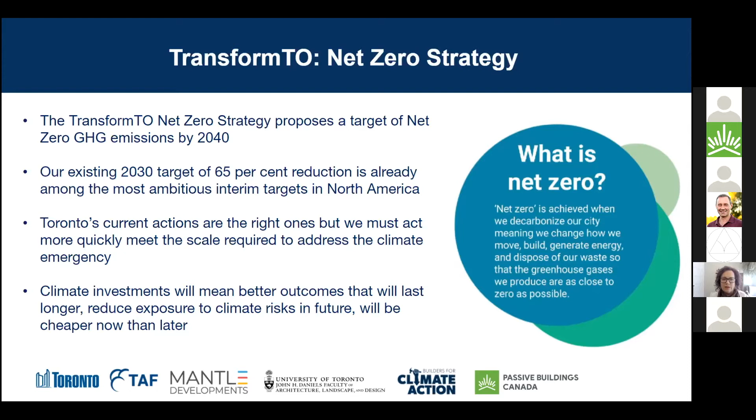And in December, our council adopted what's called the Net Zero 2040 strategy, meaning that our citywide target is to be net zero emissions by 2040 or before. And buildings in Toronto make up about 57% of our emissions out of that portfolio of different sectors. So it's a really important sector for us to really try to ratchet down our GHG emissions. And Ryan, you can go to next slide.

And one of the ways we do this, and the tool that I'm most involved with, is something we apply to new development, new construction. It's called the Toronto Green Standard, and it's been in effect since about 2010. It is a way that we take our official plan policies and our corporate objectives to improve the environment in new development and apply it as a set of performance measures and requirements in the planning application and approvals process. It's a tiered system. So tier 1 is mandatory for all new developments. We've had over 2,000 developments apply the TGS since 2010.

And the tier 2 or higher is a voluntary level, but it comes with a very good incentive called the development charge refund. And the benefit of that tiered system is it applies the 2-pronged approach, the carrot and the stick, so that we can introduce new important requirements, such as what we're going to be talking about today, to the development industry in a way that's voluntary, where they get used to doing something, it becomes more mainstreamed, and then bring it in as a mandatory requirement when possible.

And the TGS covers 5 categories of environmental performance. Right now it has about 36 performance measures in Toronto Green Standard version 4, and that comes into effect May 1st. So we're on our 4th version of the TGS, and we ratchet up the requirements each time. But it also includes something very important called the Zero Emissions Building Framework. And you can just go to the next slide, Ryan.

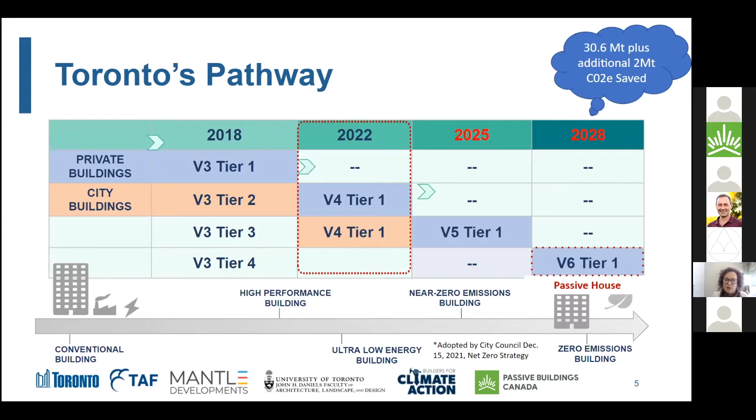Next slide, Ryan. So, about a year ago, there was a lot of activity and discussion really starting to emerge, I would say in the Toronto area anyway, and in Ontario about this important new emerging issue. And we've always been aware of it and wanted to introduce this into the next TGS, version 4. But the federal government, NRCan, was working on this. The Endeavour Centre, Chris Magwood, who you'll hear from, was doing quite a bit of work on this topic, and for the City of Toronto as well as part of our existing building strategy. And Kelly Doran was doing quite a bit of work with U of T. And Ryan, of course, who you're going to hear from, has been a leader along the way, working on policy initiatives across the country and elsewhere.

And so there was a lot of dialogue starting to happen, and this was being brought to us. And we really decided that based on the urgency of this issue, we needed to move these studies along faster. So we knew that we wanted to introduce requirements for embodied emissions reductions in the TGS, but we wanted to get these studies going sooner. So we're lucky to have the Atmospheric Fund as a local affiliate organization with the City of Toronto that offers grants across Ontario, who was able to support both of these great studies that you'll hear about today, so that we could move this analysis and understanding of the issue faster.

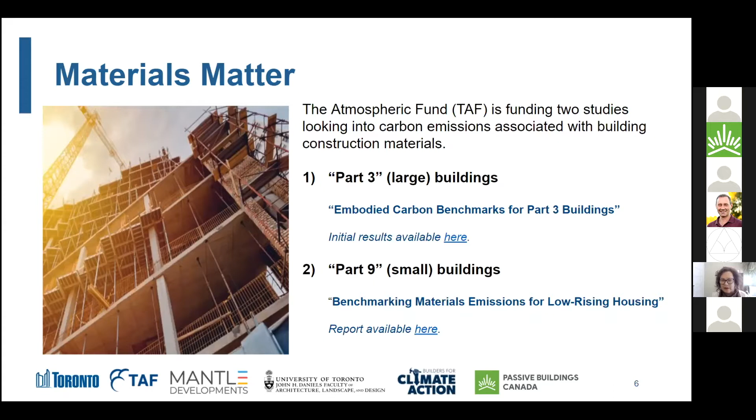Next slide, please. And so for now, in TGS 4 May 1st, 2022, what we do have is a voluntary level requirement to do the tracking of upfront emissions from structural and envelope materials, to require that in Tier 2 or a higher level in Tier 3. And for any city-owned buildings, they must do the tracking and reporting. But what we're looking at is whether we might be able to go further with that in 2023 and set out some targets. Now, we have set out some targets in the low-rise Part 9 buildings for now, under Tier 2, the voluntary level 2. Next slide, Ryan.

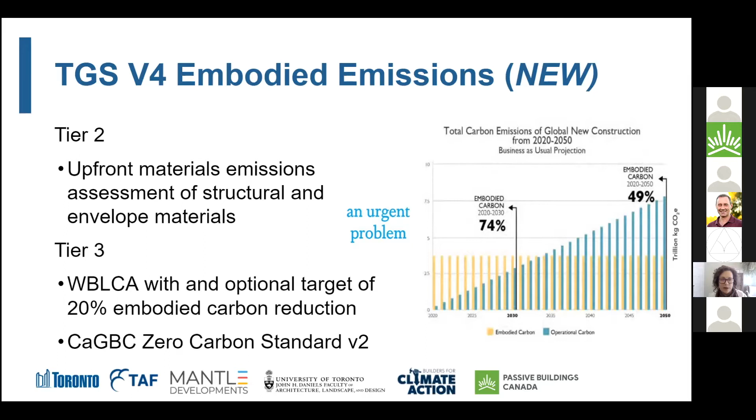So for today, we really want you to have a lot of time to hear from the leaders that we've got on the agenda today, and I'll introduce them in a second. But the idea is really to get your input, get your feedback on the studies and the potential targets that are being proposed, and to be thinking about, from the standpoint of your role as a consultant or as a specifier, what the city should be receiving, reviewing, what kind of policy we might set out, different ideas you might have about that. And of course, we want to hear about any of the challenges.

And we will take the results of all 4 workshops that are upcoming, and it will feed right into what is called a policy primer that the consultants are developing for this deliverable, and potential changes, as I say, to the TGS in 2023. And then, of course, future follow-on work, because this can't be the end of the work and study and discussion. So I just want to introduce your 3 main speakers for today and guides on this workshop. So the first is Ryan Zizzo.

Who is a professional engineer and part-time lecturer at Ryerson University and the founder of Mantle Developments. And he is one of North America's leading voices on embodied carbon in construction. And I'll also just mention, because the speakers will introduce themselves as well, but the next speaker later on will be Kelly Alvarez-Doran, who is an architect, adjunct professor at the University of Toronto and the founder of Half Climate Design. And both of those two, Ryan and Kelly, are leading the Part 3 study that we mentioned.

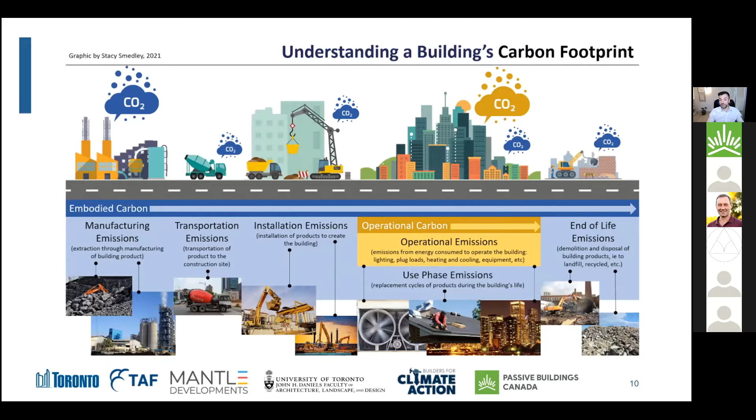You'll notice operational carbon emissions. That's the carbon from the energy we're actually using, the heating, cooling, ventilation. That's separate. That's what most people are talking about when they talk about low carbon buildings or energy efficient buildings. But we're basically talking about everything else, all the other carbon impacts of construction that are currently mostly overlooked and not regulated or managed very well.

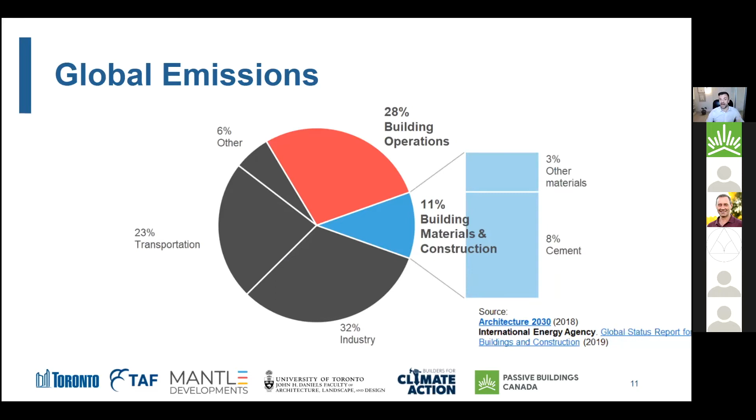And there are a lot of opportunities for us to reduce that. And the cement industry is making a lot of innovative strides. There's a lot of low carbon cement options available on the market, and this is one of the reasons that we really want to get this issue on people's agendas, because there are simple low-hanging fruit things that we can do to really drive down these emissions when we know the right questions to ask and we can get the right information to the right people in the design process at the right time.

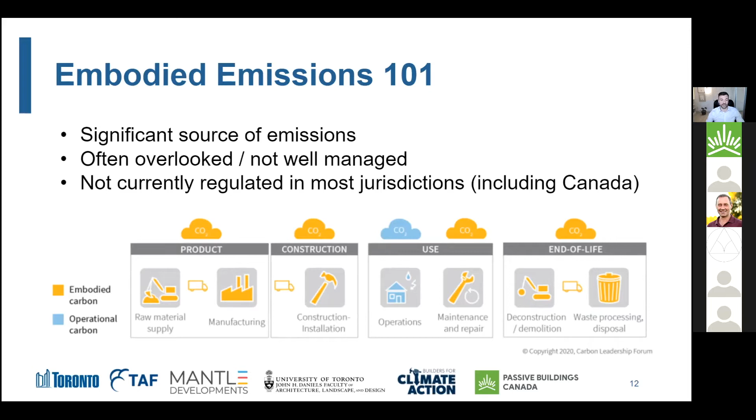So as I said, these are a significant amount of emissions we're talking about here, and they are often overlooked and not well managed or understood. As Lisa said, we are starting to see regulation come in Canada and elsewhere, and I do have a slide on that later. But I wanted to introduce the nomenclature that people use, or the different life cycle phases here.

And you can see in this graphic, this graphic is from the World Green Building Council. They have a great report called Bringing Embodied Carbon Upfront. If anyone wants to dig into this a little bit further, I would suggest you Google that and take a look. It's a really easy to digest report, but they pulled out this graphic, which is actually from one of the international standards that this is all based on. And they have these different phases, A1 through to C4 and even D.

So each of these codes is basically a different life cycle stage where the emissions are being assessed and calculated within a study called a life cycle assessment. So you might hear the term LCA or life cycle assessment. That's basically the methodology, the approach that is being applied to a long-term project like the construction and operation and demolition of a building. We would apply this methodology called a life cycle assessment, and one of the metrics that we would get out of that would be the embodied emissions, which is often referred to as global warming potential, or GWP.

So there's a lot of different terminologies, which unfortunately can be a little confusing sometimes. I think that's kind of standard when new approaches and new methods are being introduced to the industry. We haven't really all coalesced on a single set of vocabulary, so apologies on behalf of the industry about different terminologies, but the LCA is the methodology, and the embodied carbon or GWP, global warming potential, is kind of the output of the LCA.

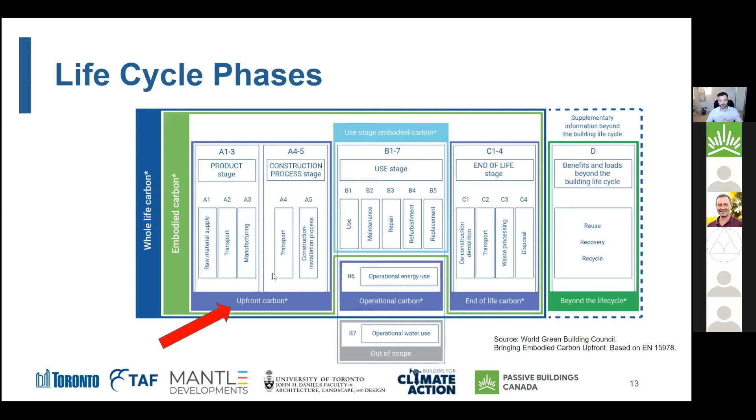And the other thing to say here is that this is the majority of the emissions, even though it might be a smaller section than all the other phases in the future. Studies have shown that this is about 75 to 85 to even 90% of building emissions, depending on the project and the region. I would say 75% on the low end of the total life cycle emissions of the building is really from this upfront carbon. So this is all about where we're procuring our materials from, how they're being manufactured, how far they're being transported. Are we getting it from a local supplier or across the world? This graphic really shows that well.

This is from LETI, which is the London Energy Transformation Initiative. So this is London, England. Again, they have a lot of really great resources on this topic. And this just shows that operational emissions, the annual use of the building, vary from year to year with weather patterns or occupancy patterns. But the vast majority of the carbon impact from the embodied sources, you can see, is upfront. We have some other ones throughout the life cycle, maybe when we're replacing the roof or making some other big material changes to the building, and then some at the end of life. But the vast majority of these emissions are in procurement.

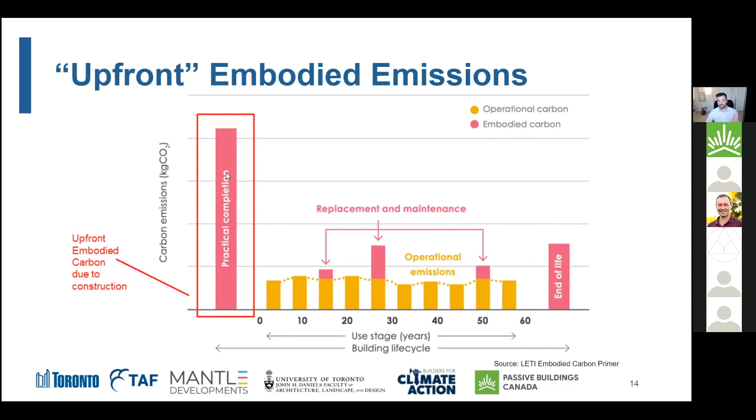But then when we go to year 60, we might have a much higher amount of carbon in the atmosphere due to the building running for the past 60 years than was emitted for the embodied section. But this split, significantly higher operating than embodied at the end of the life cycle, used to be true.

I would say 10 years ago, 15 years ago, this was the common split of embodied versus operating for a 60-year lifespan of a building. But things have changed in the past 10 or 15 years, and there's two big changes. One is our buildings are much more energy efficient than they used to be because of things like the TGS, because of things like the Ontario Building Code that have more stringent requirements coming out all the time. A new building today uses much less energy than a building constructed, say, 30 years ago. So that's item one.

Item two is that our energy system is decarbonizing. So 1 unit of energy that a building uses today is much greener than it used to be. As I'm sure everyone on the call knows, the Ontario provincial government has phased out coal-fired electricity generation in Ontario. We're using more renewable natural gas in some of our natural gas systems.

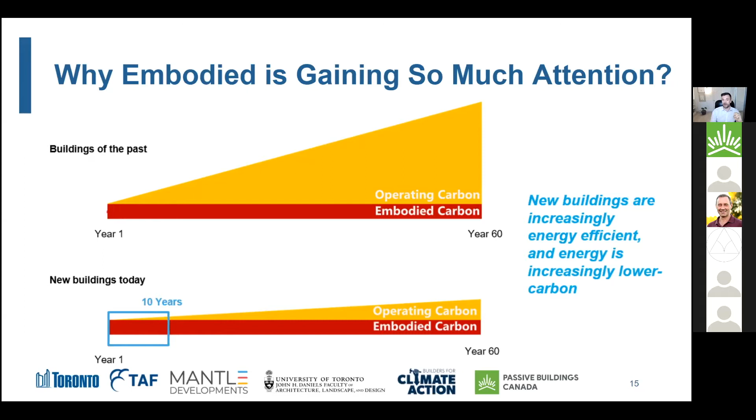So this is really why this topic has exploded onto the policymakers' agendas across the world, because we've realized this is a blind spot in the building industry, and it's actually a very, very significant amount of carbon when we're talking about new construction. So those images were kind of descriptive, but they weren't specific.

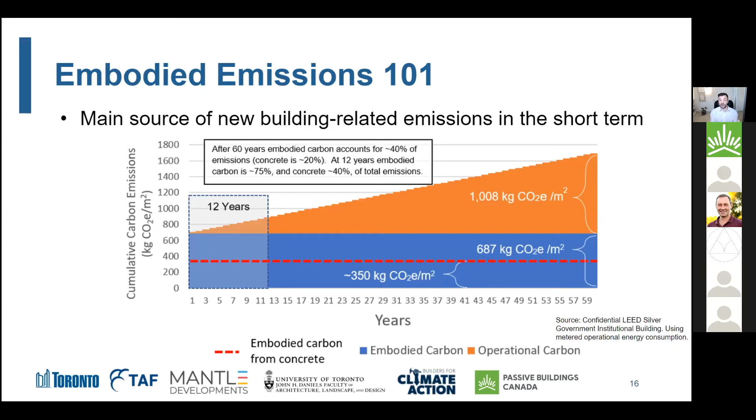And then the other thing to point out is that the red dotted line, that's the embodied carbon just of the concrete. So as I said, there's a ton of low-hanging fruit here, and we should really be focusing on the big hitters. Let's focus on concrete and cement. Let's focus on steel, insulation, glazing. Those are the top materials. We don't necessarily need to boil the ocean and get stringent requirements for every little material in a building, but let's start with the big hitters.

And how we do that, the first thing we want to do is ask for something called an environmental product declaration, or an EPD. And I like to describe this as basically a nutritional label, but for construction materials. So when we go into a store and buy food, we know when we look on those labels exactly what's in that food and what it would do to our body. But we don't have that kind of a label for the construction materials we're buying.

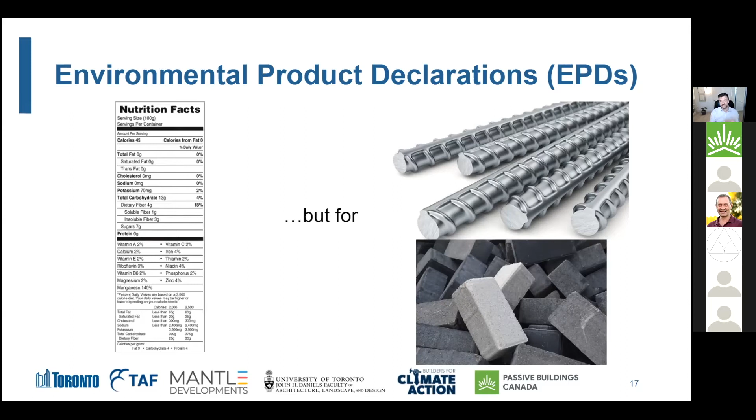What's in it, and what does it put into the atmosphere when it's being produced? So that's basically what an EPD is. It's a report that will show you that. And EPDs can be quite long and maybe a little intimidating to interpret, but just like in a nutritional label, you're probably not looking at every little thing on the label.

And the one thing I would suggest optimizing for is global warming potential, or GWP, which is the embodied carbon of the product. You might recognize these codes from the previous slide I showed, which was the different life cycle phases. So this is the total embodied carbon of this rebar from harvesting the materials, transportation, and fabrication. So this is a number that I would want to look at, compare against other products, and find the lowest value. That's basically how we would use an EPD.

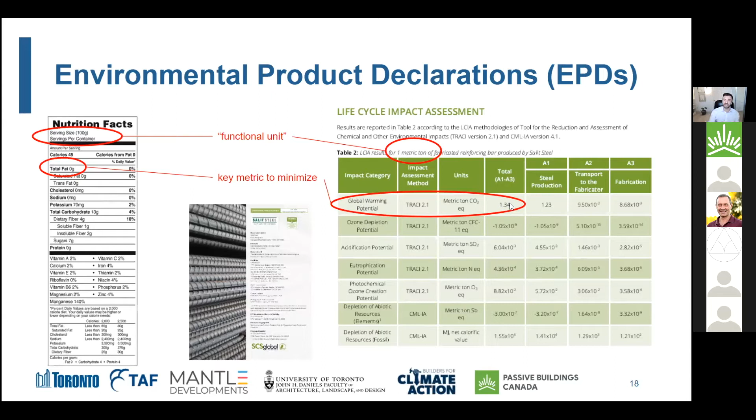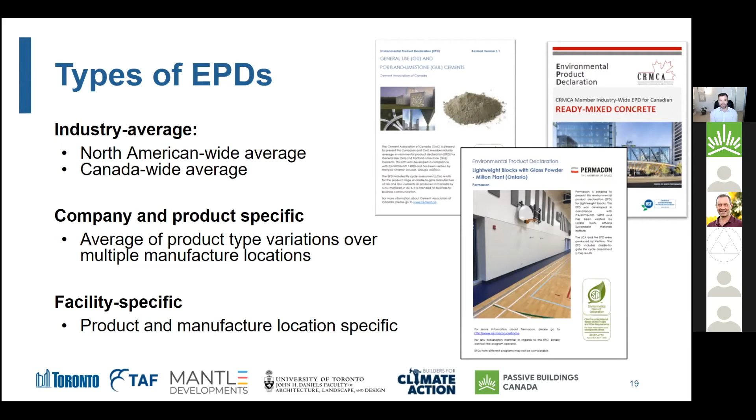So when we're trying to optimize this for our actual construction projects, it's best to have these facility specific EPDs that show you the actual carbon footprint of one product from one location, as opposed to these industry average EPDs, which are still useful, but ideally we will move more to the specific ones over time.

There are other strategies at the federal level. The federal government has something called the Greening Government Strategy, which has requirements now for all new federal construction as of 2022, and they're aiming for a 30% reduction in embodied carbon by 2025. We're also seeing the city of Vancouver targeting a 40% reduction in embodied carbon. They're requiring all new rezoning applications to be reporting their embodied carbon, and limits will be put in place shortly. And also Waterfront Toronto requires reporting on their projects as well.

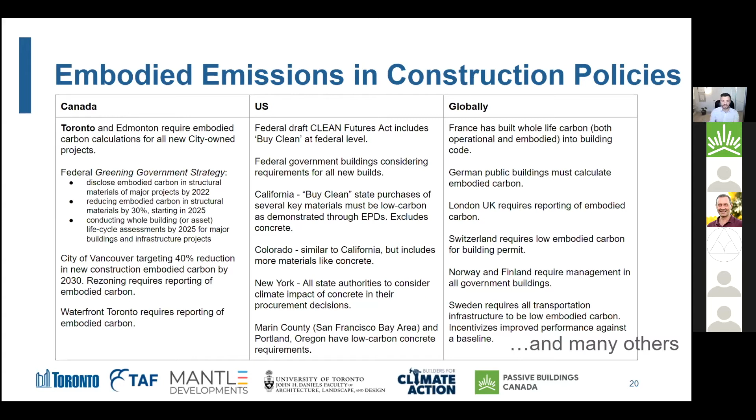There are many other policies around the world, lots in the US, lots globally. We don't have time to touch on those, but if anyone wants to dig into any of these more, I would recommend checking out the Carbon Leadership Forum website, CLF. If you type in CLF policy, they've got a great overview of different policies globally.

And just to mention, there are some tools that can really help streamline these assessments. I know it's quite broad and it can be daunting, the scope of what we're talking about here, but with the use of some of these tools, many of which are free to use, project teams can effectively manage the embodied carbon on their project.

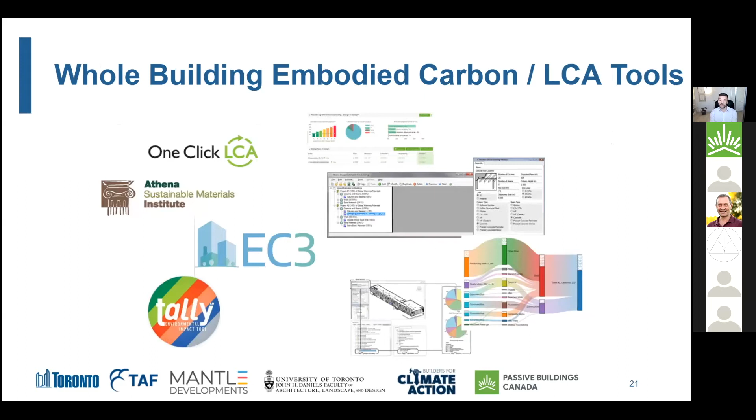You can do LCAs or embodied carbon assessments at different phases of the design, and there are different strategies that you would get from doing it at each of those phases. So I won't go into detail here, but we'll share the slides after so you can refer to this later. But we can do an LCA at schematic design.

I like to call this a Class D LCA to align with people's thinking around cost estimates. This is where we would make high-level decisions like, what type of material are we using? Is this going to be a concrete building or a steel building, or maybe a mass timber or a wood building? What's the massing going to be like?

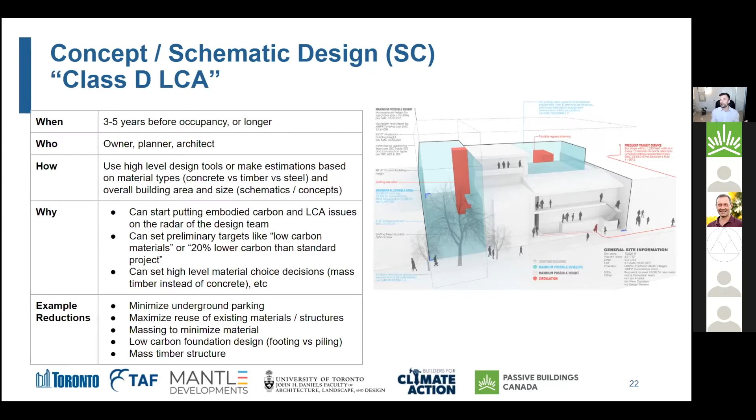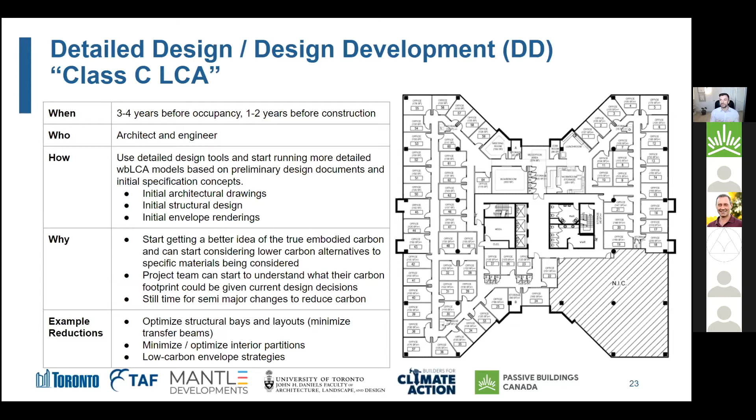If we can reduce our underground parking and have more active transportation, how much of a carbon benefit can those types of high-level decisions achieve? We can do a more advanced or a more refined model, what I would call a Class C, during the design development. And here we can get more into the specifics of optimizing the layout and the floor plans, and maybe a little bit more specific on the materials that we want to use.

We can do a Class B during the procurement or pre-tender phase, when we're just getting ready to issue those construction documents. And this is where we're really getting into the fine grain decisions about what's the recycled content in our steel, what's the properties around the concrete in terms of the type of cement we're going to use. Is it going to be a lower carbon cement, which is available for a cost neutral and performance neutral, but we just need to ask our suppliers for that.

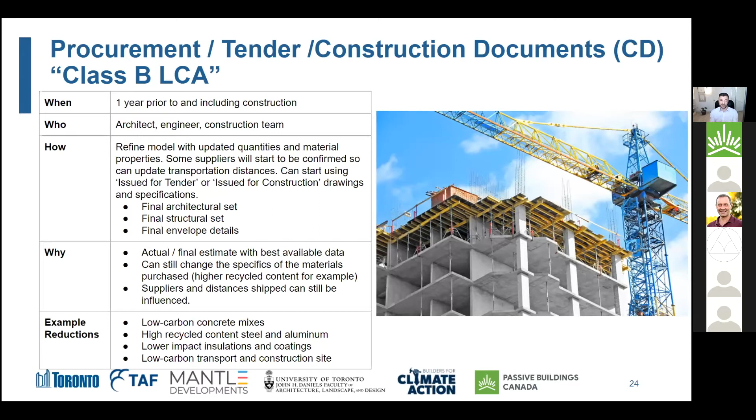Are we going to maximize SCMs? Can we change any of our mixes from standard 28-day curing to 56-day curing, which means we can use less cement and therefore less carbon? So there's, as I said, a lot of low-hanging fruit that we can unlock with these types of analysis.

And finally, we could do a Class A. These are terminologies that I'm applying, but they're not standard in the industry yet. But I like to think of a Class A LCA as a post-construction. This is an as-built model, and this is where we can really learn about what the final carbon footprint is, and maybe we would purchase carbon offsets to account for that carbon, so that we can claim the building to be carbon neutral.

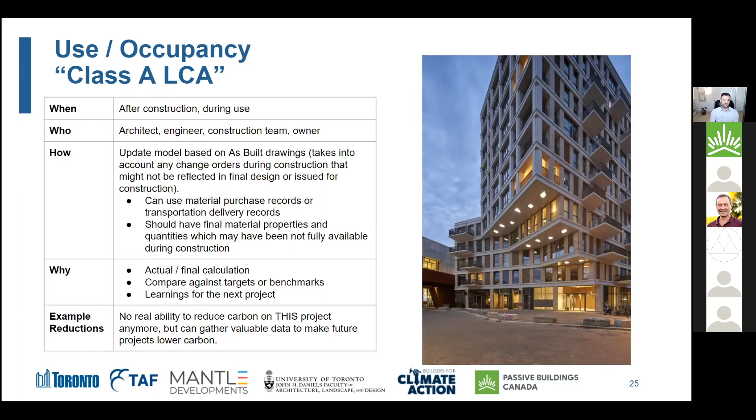So I'm about to wrap up here, but some quick best practices to reduce embodied carbon. First thing is just to ask your suppliers. A lot of suppliers do have lower carbon options, but they're not being asked for them by the market. So ask what we can do to have a lower carbon product, and you'd be surprised what you might find. We found that super tall buildings, real big high rises, actually have a higher carbon footprint because of the additional underground footing typically, and other material impacts, which Kelly will comment on in a little bit.

For concrete, I mentioned some of these. Use Portland limestone cement. This is a 10% lower carbon impact. It's cost and performance neutral. It's readily available across Canada. Maximize our SCMs. Normally mixes are about 5 to 10%, but we can go significantly higher than that, and that can reduce our carbon quite substantially, and consider longer curing times, going from 28-day to 56-day for materials that don't require early strength, like slab on grade, footings, foundations, or shear walls.

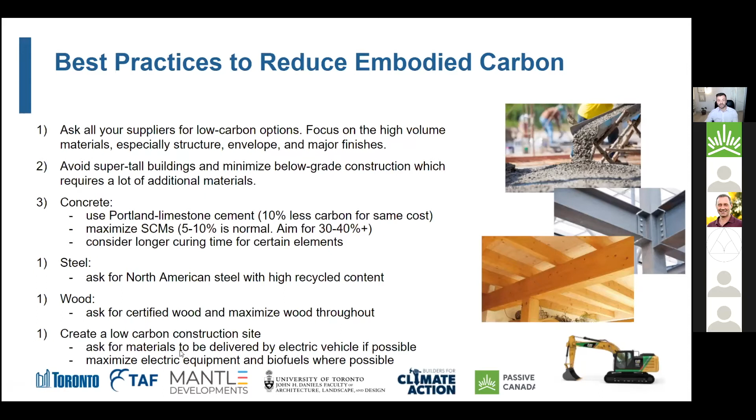For steel, we want to use North American steel with high recycled content instead of shipping it from other parts of the world where they make their steel using coal-fired blast furnaces. For wood, we want to ask for certified wood from sustainably managed forests. And there's things we can do about having a lower carbon construction site too. Let's try to use electric vehicles wherever possible. Let's try to use biofuels in our delivery. So there's a whole host of things we can do to really reduce the emissions.

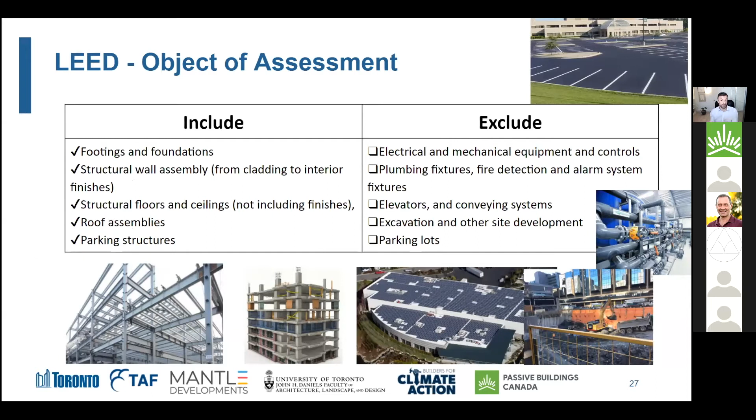And then one thing quickly just to comment on is that LEED is one of the main drivers for this currently, and it only includes some parts of the project like footings, the structure, the envelope. There's a whole bunch of things that are excluded for a LEED compliant LCA, like mechanical, plumbing, excavation, and parking lots. So just to say, when we're looking at whole building LCA results, one of the first things you should ask is what's included in that, because it might not be everything. There might be significant amounts of materials that are being excluded from the model.

So with that, I will hand it over to Kelly. Right, thank you, Ryan. Going to move on to the next slide.

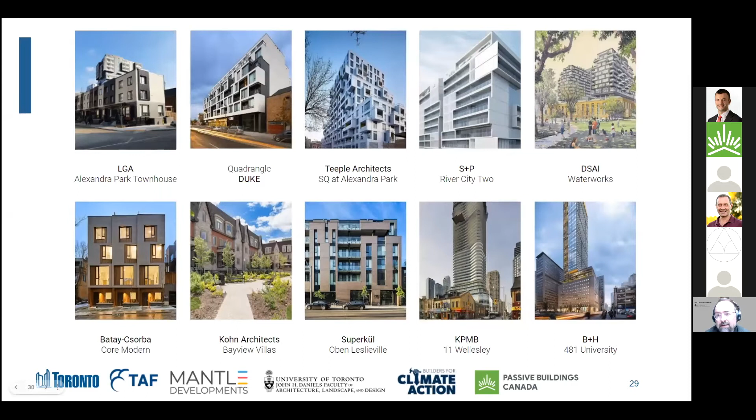So about 2 years ago, I approached the University of Toronto to lead a studio at the School of Architecture, looking at embodied carbon as a way to help catalyze this conversation, specifically in Toronto. And to do so, last year we looked at these 10 multi-unit residential buildings, and this year we looked at 10 mass timber buildings. And I think that what came out of this were some interesting findings that I then brought on to Lisa and have led to the study. So I'm going to show you some of the work from last year and also the study that we're doing right now, where that's at. Next slide, please.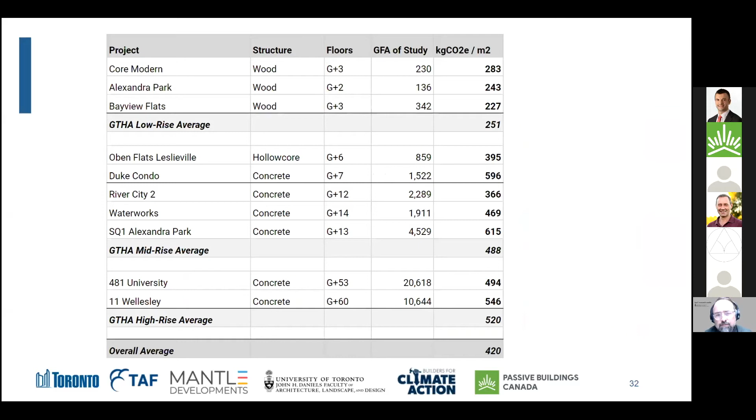And the first thing to look at is that on a square meter basis, the lower rise wood frame projects have roughly half the emissions of the mid-rise and high-rise. And of those mid and high-rise, they're about the same. When you go from about 4 to 6 stories up to 60 stories, there's not a huge difference, I would say, on a square meter basis. But within the projects, there's actually quite a variation, and we wanted to understand why.

Next slide, please. So the main key drivers of embodied carbon right now in contemporary construction worldwide, but certainly specifically in Toronto, are the structural systems. We use a lot of cast in place reinforced concrete in Toronto. We are addicted to the stuff. It's cheap. We invented fly form, and it's the primary ingredient of our buildings, to use Ryan's analogy here.

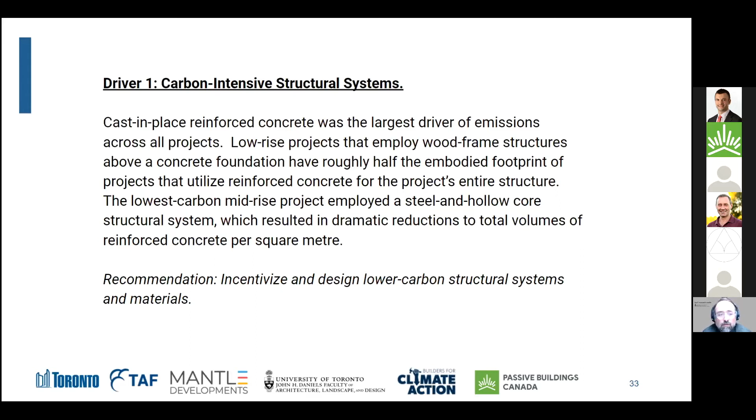Low-rise projects that employ wood frame structures had roughly half the emissions of the high-rise, as I mentioned, and the lowest carbon mid-rise project actually employed a steel and hollow core slab system. So it did everything it could to reduce the overall volume of cement and concrete in that project.

Next slide, please. And here's a look at the 10 projects, the radius being indicative of total footprint, and the colors indicative of the percentage associated with the material. So you can see concrete there, by and large, a big portion of all the projects. And then next is aluminum.

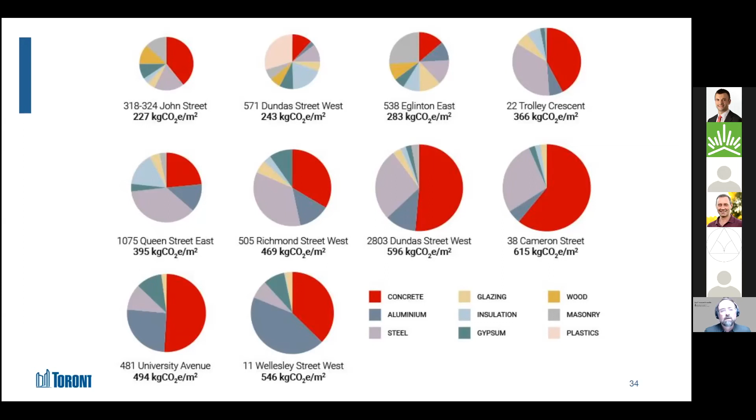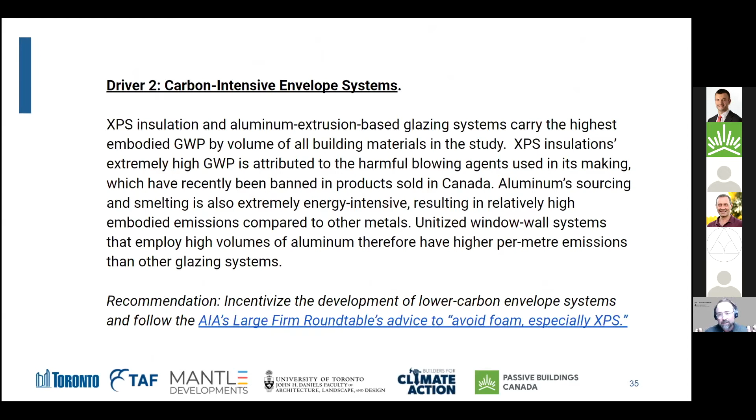Next slide, please. And that aluminum has to do with how we glaze our buildings, and also a lot of the envelopes, so how we wrap our buildings. As an architect, it's completely the domain of architects and building envelope specialists. And what we can see in contemporary construction is that we use a lot of foam, specifically XPS insulation historically, and a lot of aluminum-based extrusion systems, window wall systems, curtain wall systems, high window wall ratios in Toronto. And as a result, our buildings have very high embodied carbon, off the charts compared to some other parts of the world.

Next slide, please. And here's a view of some of the envelopes. On the left, some of the lower rise townhouse envelopes of wood or metal stud, more typical rain screen veneer systems. And on the right is an off the shelf window wall system. So you see some key things.

We wanted to know carbon intensity on a square meter. So the window wall is roughly twice that of, say, a wood stud wall or a metal stud wall with a brick veneer. And from an R value perspective, it's not comparable. So I think it begs the question, is this really a sustainable way to be designing and cladding our buildings? I would argue not in this specific lens.

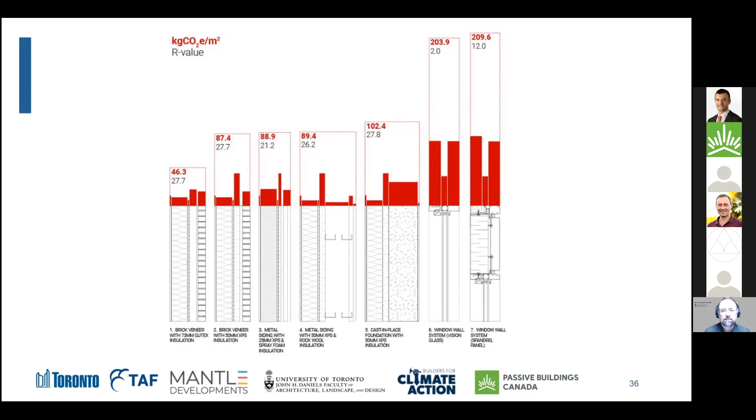Next, please. The third, and I think this is where things got really interesting for the conversations with the planning department, is the unintended consequences of things like minimum parking requirements that pre-existed. Foundation works, parking structures, anything that we do below grade has a disproportionate impact on a building's footprint. So for the mid-rise and high-rise structures, up to half of a project's total emissions have nothing to do with the provision of housing, but the provision of parking.

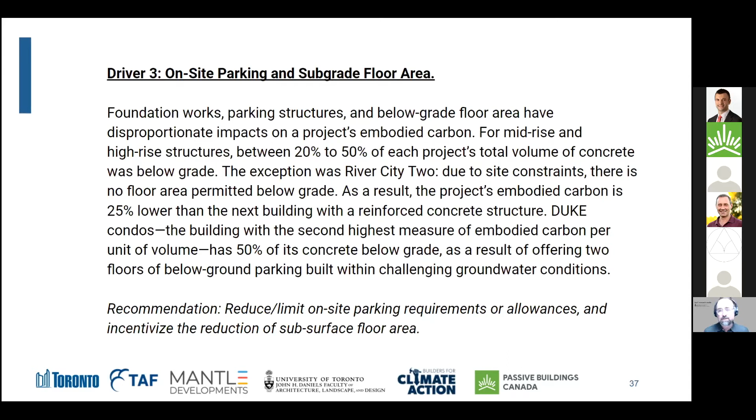Next slide. So here you can see the lower rise projects. Again, this is indicative, and you'll see Chris's presentation following mine. Our foundations, our concrete basements, our desire to go deep into the ground is really where so much of the emissions lie. And even with these projects here, you can see on the left just a half basement, 2/3 of the project is in that condition.

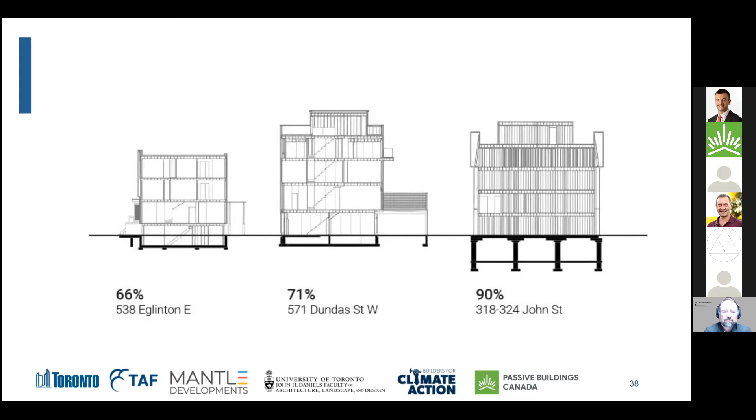Next slide, please. And with the mid and high rises, a big variation here. River City 2, 22 Trolley Crescent, only 8% because of the floodplain there.

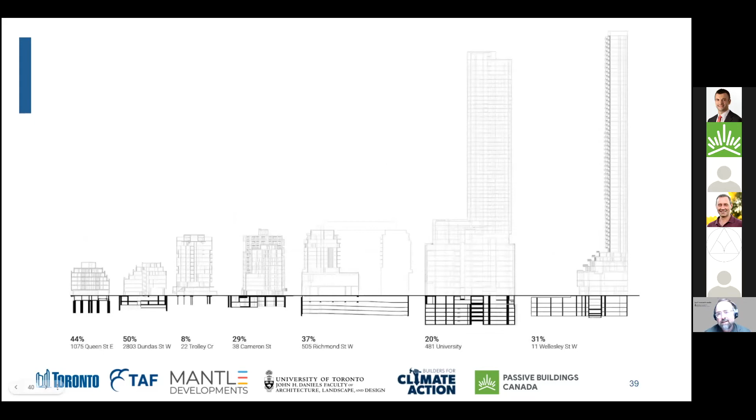That could not go down, which is a blessing. And then right beside it, a project in the Junction built on an underground river course, where they had to basically build a concrete basement to deal with the subsurface conditions. 50% of it below grade. So I'd say, again, a kind of cynical way of looking at this is clearly this is not the behavior of a species looking to survive. We have to figure out how to get less of our buildings below the surface of the earth. Next, please.

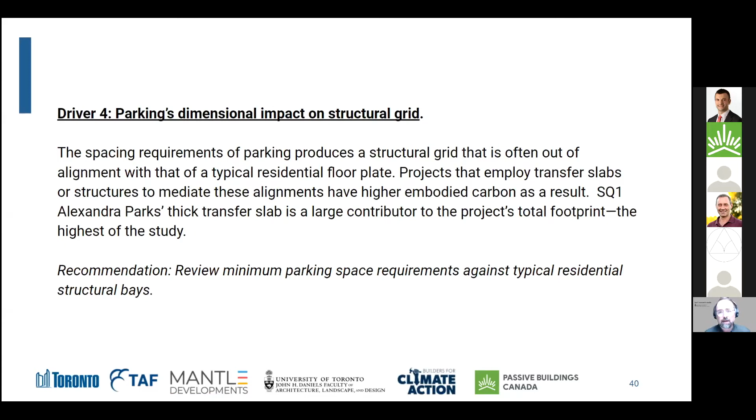And the kicker on this parking is the dimensional impact on the structural grid. So if you've worked in this, you realize the dimensions of a kitchen or a living room are not the same as a parking space. And so to reconcile that geometry, structural engineers, as you know, introduce a lot of structure to do that.

And the next slide will show one of the projects, this in Alexandra Park, where those two grids being off each other result in the entire ground floor of this project being a 1 meter deep concrete transfer slab to satisfy the parking requirements below grade. Again, once you see it through this lens, I think we have to think about how we move beyond this form of city making. Next, please.

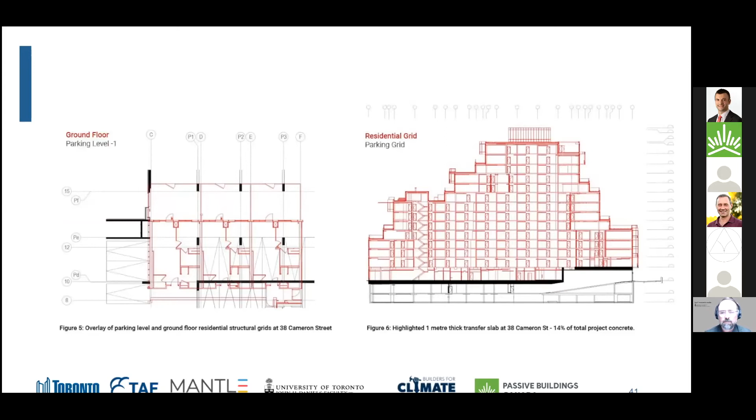So, bringing this to a broader audience here, an open letter I wrote to planners a year ago to think about how do we change the planning laws? What can we be doing at municipal levels to deal with this? Because so much, like parking, was unintended consequences of certain planning and zoning requirements. And that opened up a conversation with Lisa, and that led to the study.

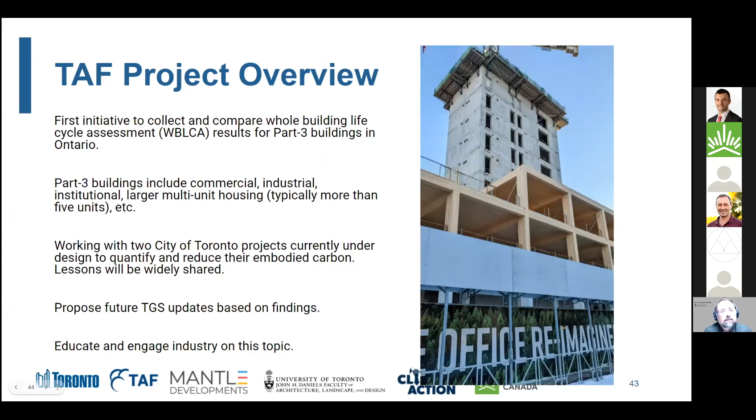Next slides, please. Working with Ryan and Lisa and the team for the last year or so through the funding from TAF, it's been the first initiative to collect and compare whole building life cycle assessments for Part 3 buildings in Ontario. There's obviously the clear connection with the Part 9 study you're about to see. The Part 3 buildings include commercial, industrial, institutional, and larger multi-unit housing.

And as part of it, Lisa also had the foresight to take 2 of the city's current projects that are in procurement and look at them through this lens to understand what the implications would be of a policy on projects, specifically city ones, but also what we could be doing in a design development phase of the project to improve them. And we'll show you that as well. And the purpose of this is to feed into the future green standards. Next, please.

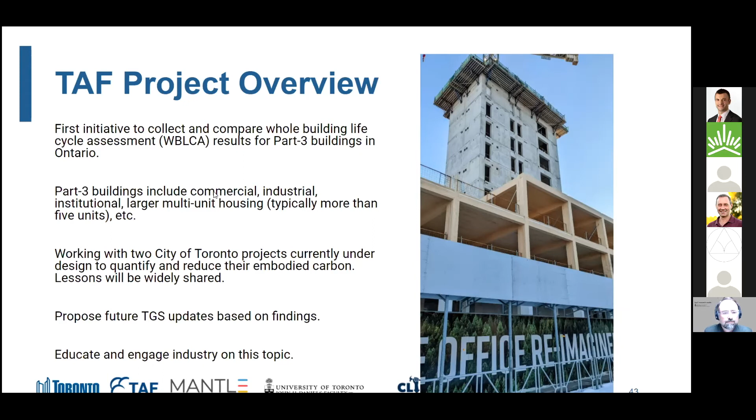And the data we had is actually pretty tight. These boxes, the 80th to 20th percentile, are pretty tight. Certainly on the mixed use residential and the commercial office, you can see the projects are all around that same level. And through this, we're beginning to say this is the first benchmarking of its kind to then be pegging future policy against. Next, please.

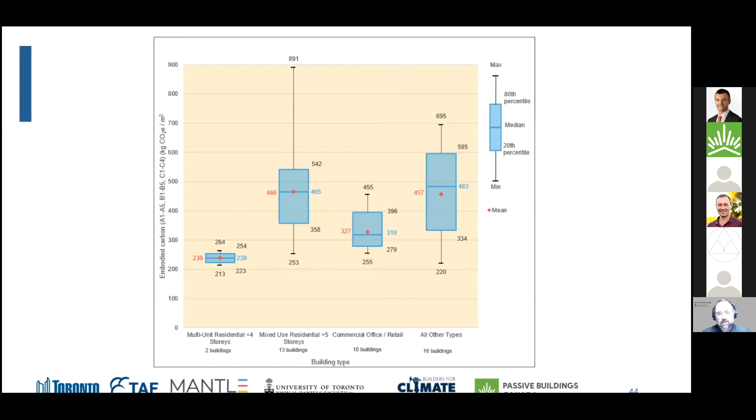Here you can see where those upfront emissions live. It's by and large in that product stage, which I won't go into, as Ryan's just covered, but this is where we really need to be paying attention: what are we making our buildings out of and where is it coming from? Next, please.

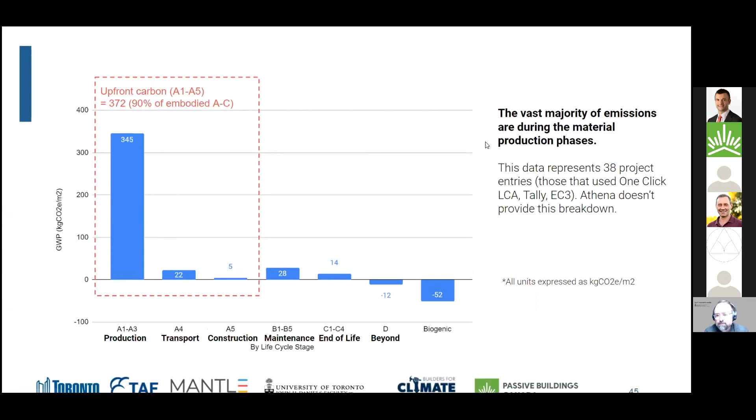Where is it in a building? So per some of what I just showed, so much of it's in foundations and floors and beams and columns. Those three things are by and large cast in place concrete in much of the building stock we're looking at. The walls are the envelope, and then roofs and extra materials, some of the interior finishes here.

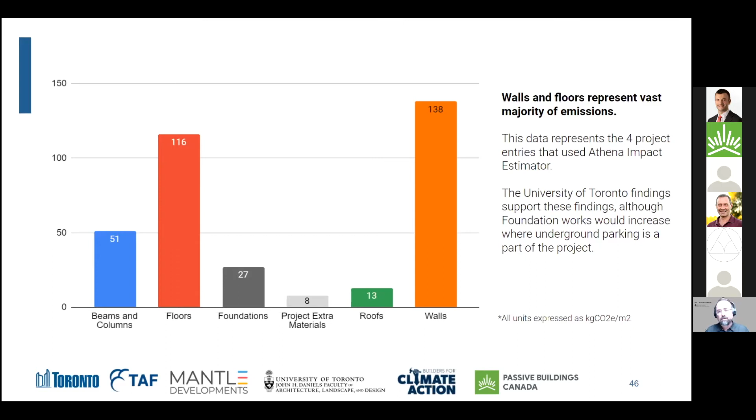But one thing to take away is, how do we look at structure and design structure through this lens, and how do we look at envelope through a whole life embodied carbon lens too? Per the time scale that Ryan was looking at, is a high performance envelope really the right thing to do if it comes with a big upfront footprint? Certainly in the context of a place like Toronto that's got a clean and green grid, I would argue probably not. Next, please.

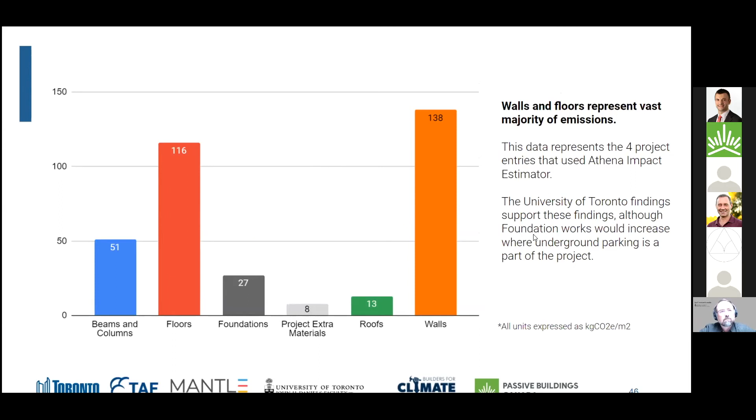Here, one of the two city projects we got to look at, we looked at the emergency services building, the EMS building designed by Diamond Schmidt. We worked with the city's project manager and the architects to look at this. Another project we looked at with MGMA and GH3, some of whom I see on the call today.

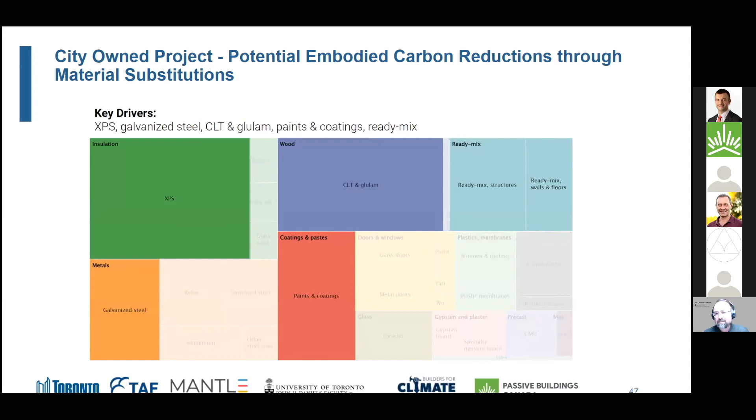And the first thing we asked was, okay, well, if we're going to go after some findings or some reductions, where are they? And so it's a good representation of, say, the scale of where the current emissions lived. And we said, okay, well, we could probably do something about that XPS insulation. We could look at the steel. Paints and coatings stuck out as a little high too. Next, please.

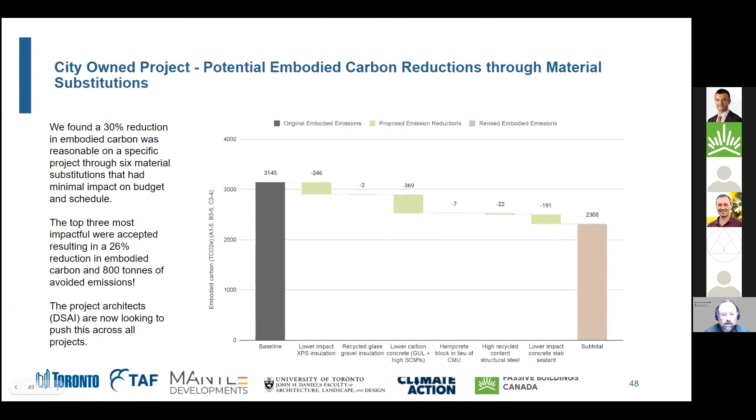And so we came back to the project team through doing a full study of it with some suggestions. And this was a project on a per square meter basis that was already very low. I think in those box plots earlier, it was on the low side. It employs CLT roof structure, has an incredibly efficient facade system. And even then, we identified a 30% reduction in just cost-negligible specification adjustments.

So this was looking at, to Ryan's point about concrete, the specific mix of concrete available, the specific insulation being used, and the sealant on the floor itself. And the design team went back, talked to their costing teams, design teams, easy changes to make in the design process. They came back and said, we're going to employ all of this. And it results in a 26% savings or 800 tons reductions over a 2-week study.

And I think most encouraging, Diamond Schmidt came back and said that this report has gone viral in our office, and we want to take this approach to all of our projects, which is exactly the kind of impact we were looking to have. Next, please.

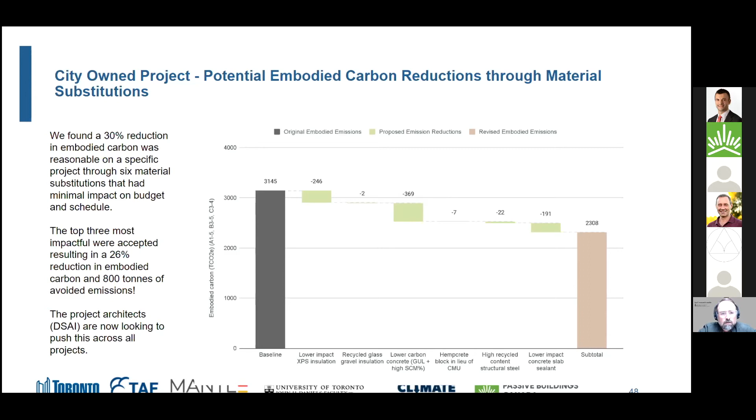And so the next steps here, we're on the Part 3 study. We're holding these workshops. The first is today with you all. We'll be doing one with manufacturers next week, with developers, building owners, and contractors in the middle of May, and with government officials and regulators come June. And then we'll be working together to put that into a primer with recommendations for the next version of the green standards. Thank you.

All right, thanks, Kelly, and thanks to everybody for tuning in today. My name's Chris Magwood. I'm with Builders for Climate Action and the Rocky Mountain Institute, and I was the lead researcher on the Part 9 study. We had a great team involved in this and a great partner in Passive Buildings Canada, and we were really excited to be able to undertake this study. Next slide, please, Ryan.

So one of the things different between this Part 9 study and the Part 3 study is that we were provided with plan sets of homes in the GTHA from developers. So we were working from as-built homes, and so we were able to do the exact same analysis using the exact same tool on all of these plans.

In total, we had 59 plan sets that represented, in the 2 years that the study was looking at, 503 as-built homes made to those plans. So it was a good size of a sample. It gave us a really good sense that we were capturing lots from across the whole GTHA, and that the results would be very comparable within that data set. Okay, next.

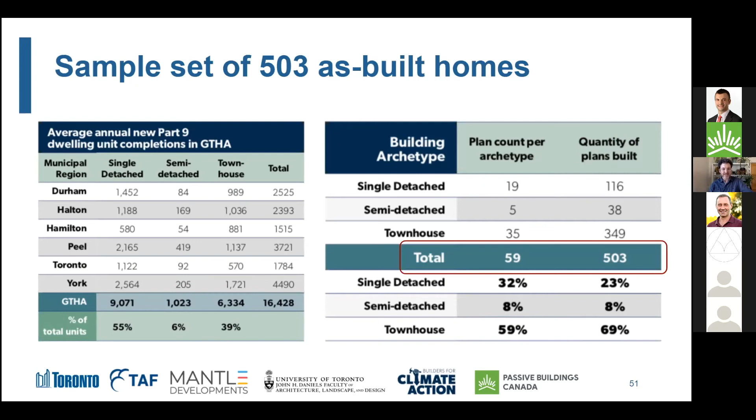So, Brian talked about scope and so did Kelly, but for this study, we used a tool called BEAM, which we developed in-house at Builders for Climate Action. And it's giving us results for what we call the material carbon emissions, that upfront part that has to do with manufacturing the building materials. So we are not looking at transportation to site or installation. And again, we're focused there because we know that's where the big chunk of the emissions live.

We're also looking at basically the structural, enclosure and partition materials. So things that aren't included are things like site work, stairs, mechanical, electrical, and plumbing equipment, surface finishes, appliances, all of that kind of stuff is not included.

So we figure, looking at some studies where all of those things are wrapped in, that we're kind of accounting for maybe 50 to 60% of all the embodied carbon in the houses we're looking at. But we focused on this range of materials for a couple reasons. One is it's the set of materials where we have the best data set. We can represent all of the materials in a really good way, whereas lots of the ones we left out, there just isn't very good data for them.

And we also feel that these are the materials where a lot of action can be taken by somebody to reduce those emissions. The only way you're going to reduce your mechanical and electrical and plumbing emissions is to plumb less or wire less, and that doesn't seem like a change that we would be driving with this study. But you can think about your structural materials, your insulation, your windows, all of those things. Really big reductions can be achieved in those material sets. So we'll go to the next one.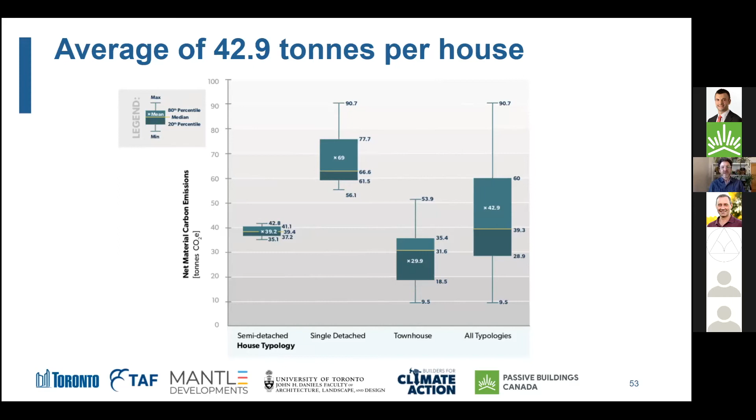And so that's interesting from a planning perspective, that if we want to drive overall emissions down, thinking about grouping houses, townhouses are a good way to go. But essentially, we're looking at just under 43 tons of emissions per house for the structural enclosure and partition materials. Okay.

However, we didn't want to just use the lens of overall emissions because the size of the units matters. And so if we look at emissions per floor area, you can see that the results really tighten up on the left. That's the total floor area. So that would be taking in garages and any unheated space in the house, so unfinished basement areas and things like that. And you can see that suddenly the results really tighten up because we're attributing emissions to the size of the building. So obviously, if you make a tiny house, it can have a lot less emissions than a really big house just by the volume of materials.

So by looking at it by floor area, you can see that actually these Part 9 buildings fall within a pretty tight range. We also looked at it by heated area. So this would be sort of wrapping the garage and any unheated basement space in, so that you're actually sort of paying a bit of an embodied carbon penalty for that. And then even further to the right is habitable area. So making sure that we're really only attributing emissions to the places where people live. And you can see at each of those phases, it goes up a little bit.

But the interesting thing here is that we did find over such a large group of homes a fairly tight range in which all of these landed, especially when we look at it per meter squared. Okay, next.

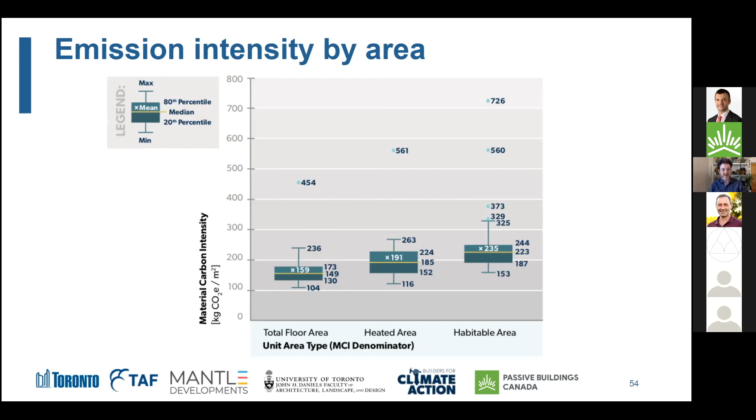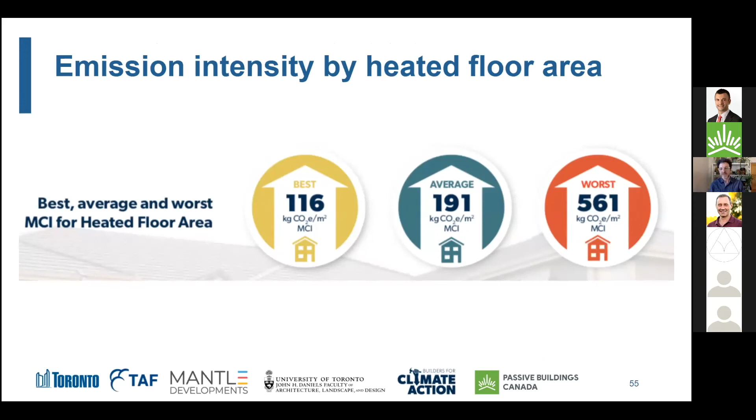So this just kind of sums that up for the heated floor area. So the carbon intensity ranged from a best case of 116 kilograms per square meter of heated floor area. The highest example in the study was 561 kilograms per square meter, and the average landed at just over 191 per square meter. So you can see that there's a pretty wide range there, but a lot of the buildings were clustered really closely around that average result.

We were also able to look at the impact of different material categories, and very similar to what the Part 3 study found, we found that just 3 material categories, concrete, insulation, and cladding, accounted for 72% of the total material emissions. So if we're going to really try to make a difference here, these are the areas where we want to concentrate. Things like roofing, framing, post and beams, windows, all of that stuff, there are certainly savings to be made there, but the lion's share belongs in just those 3 categories.

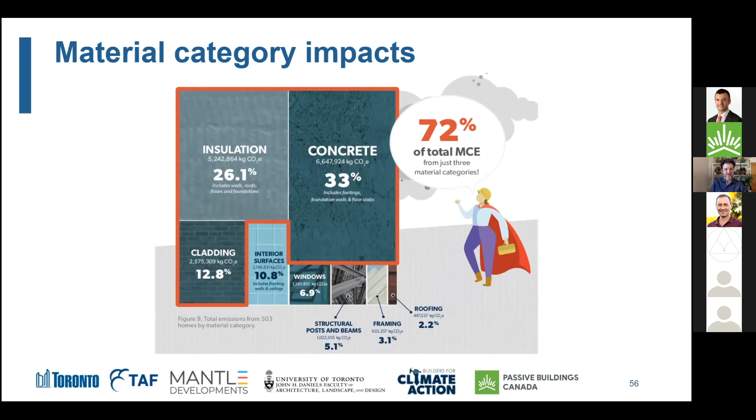And so that's where we would recommend that we kind of pay attention in the low-rise market, is to making reductions there. Okay, next. So also along the lines of the Part 3 study, we took a couple of the buildings from the study and looked at making some material changes. Same kind of parameters as with the other study. We wanted to look at achievable, affordable, code compliant type substitutions that could be made.

So we started with a building that had 81 tons of emissions, or 262 kilograms per square meter. And we did things like use a lower carbon concrete mix, then substituted cellulose insulation in place of the other insulations that had been used in that building. Took the XPS foam wrap around the building and substituted wood fiberboard, changed the brick cladding for engineered wood cladding, and took a bunch of the other categories like flooring and drywall and didn't change the material, but just changed to the best available product, the product with the lowest emissions in those categories.

And you can see it's pretty remarkable that that brought about a 75% reduction in those emissions. So we went from 262 kilograms per square meter down to 66 with just a small handful of substitutions, all of which are doable and achievable today. And then if we go to the next one, this stood out to me as being really interesting. So this is an overlay on the graph you just saw. So you can see now we're looking at one of the houses that had the lowest carbon footprint to begin with. So that little orange box on the left, it started with only 33 tons of emissions associated with it. We applied all the same substitutions, and we ended up at 56.5 kilograms per square meter. And the previous house landed at 66 kilograms per square meter.

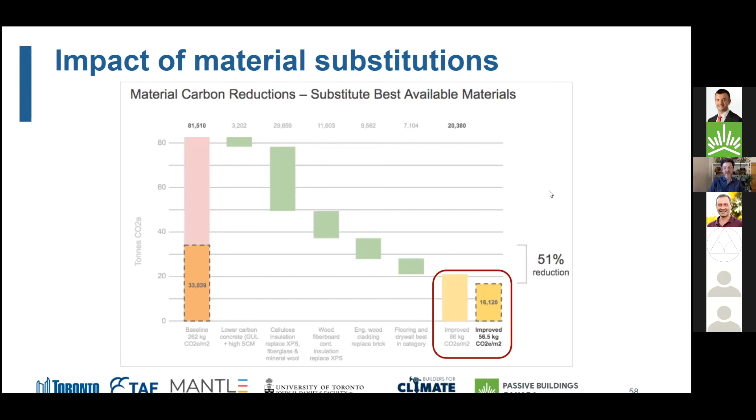Chris, sorry to interrupt, but one really important question came up in the chat that I think you'd want to address. They said a 75% reduction in carbon at what cost? Yeah, at no cost or very negligible cost. In some cases the material we're substituting is actually cheaper than the one it was replacing. In fact, in a couple of the main categories, that's true. In this case, the lower carbon concrete doesn't have a cost penalty. Moving to cellulose insulation looked cheaper. The wood fiberboard is more expensive than the XPS. The engineered wood cladding was cheaper than the brick. And in the flooring and drywall categories, it was just a brand choice.

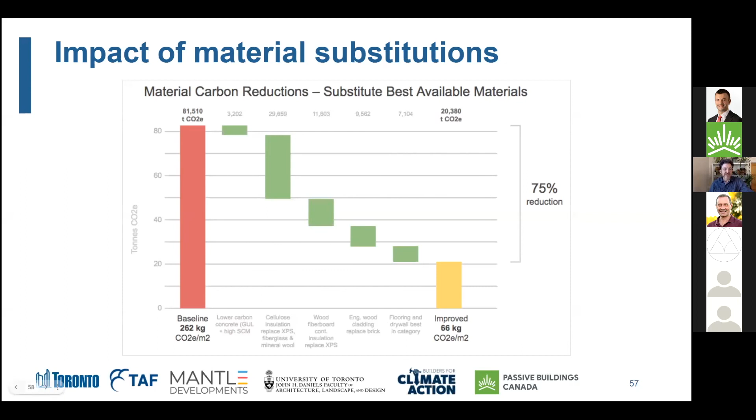So, negligible cost there. So I think we see that in general, you could achieve that suite of changes at or about the same cost. It might be a little more, it might be a little less, it might be on par, but there's really not a heavy price penalty to be paid here. And I think if you do this smartly, there could be no price penalty. And in fact, the house could be cheaper. Thanks for directing that one, Kelly.

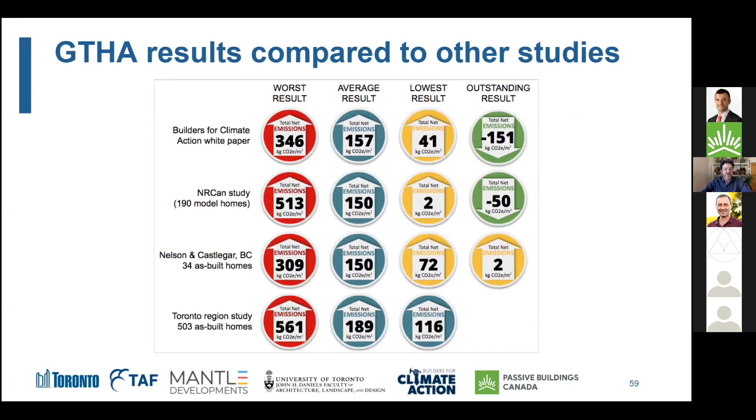So I just wanted to show you, we have done some other studies for other regions. We did a study for NRCan, looking at model homes across the country. And we also did a study for the cities of Nelson and Castlegar in BC. And what's interesting is, we found that the ranges, especially in the worst results and the average results, are pretty close across the country, which gives us a sense that the results we're seeing in Toronto aren't necessarily unique, but that everything on average landed between sort of 150 to 190 kilograms per square meter. Okay, next.

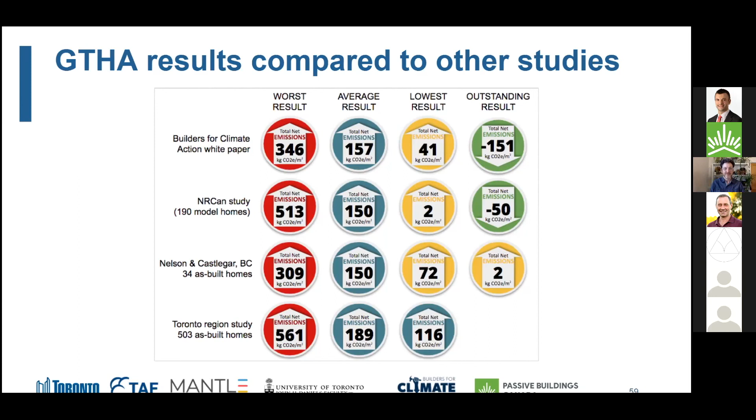And this is where I was going to sort of bring up the cost issue, because one of the things that really stands out from both the Nelson study and this GTHA study is that none of the builders who submitted plans for these studies are building buildings to intentionally have a lower carbon footprint, right? They're just sending us the plans that they're currently building now. This fits their business model. It's what they build, it's what they sell, it's how they make their living.

And it's interesting to see that there was a whole cluster of homes in the GTHA study that came in around that 116 to 120 kilograms per square meter. That builder was not intending to make a low carbon home, but they're beating the average by 40%, which means somebody's business as usual is already 40% less than the average. And when you compare that to some of the higher results, it's a huge achievement.

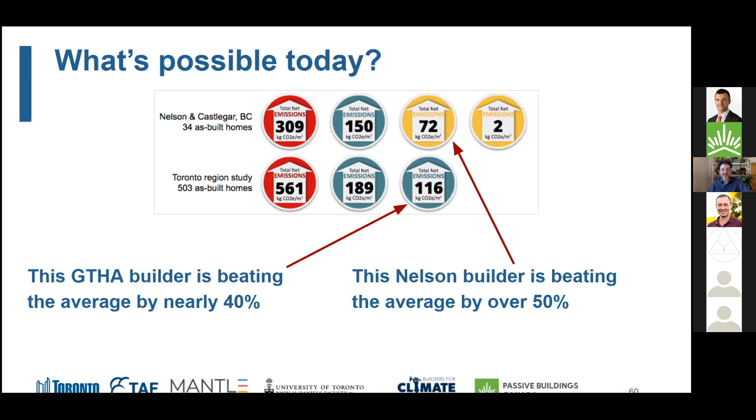So even if we can just get everybody to be doing the thing that this builder is already doing, that's a 40% reduction. We don't get easy 40% reductions in the climate change space very often, but this really points to that being possible. And the same thing happened in Nelson. There's again a builder just building the house that they always build, and beating the average by 50%. So it tells us that there's a lot of room, and that we don't have to, initially anyway, go very far out of anybody's comfort zone to see 40 to 50% reductions in this building space. Okay, next one.

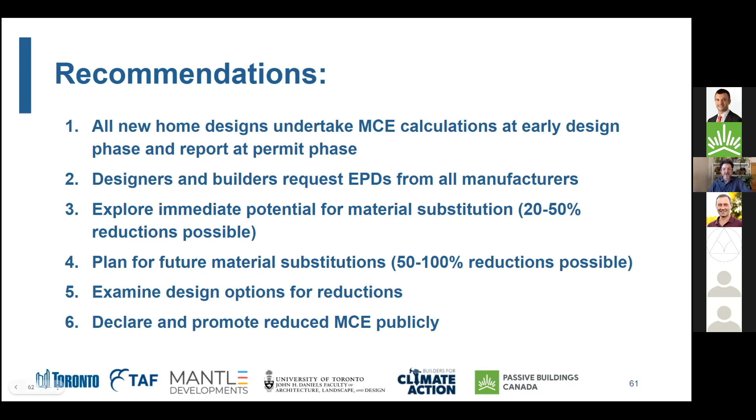And so I definitely invite you to go download both of these reports. There's a lot more in them than we're able to cover in these 10-minute sessions, but the final recommendations for the Part 9 study: we recommended that all new home designs do this kind of calculation at an early design phase, and that municipalities ask for that report in the permit phase. That everybody in this call, designers and builders, request EPDs from all the manufacturers.

I noticed there were some notes in the chat saying, are there enough EPDs, or I couldn't find product-specific EPDs. And I've seen the number of EPDs really explode in the last couple of years. And that's because people are demanding them. And I think the more we demand them, the more complete data set we'll get, the better we'll be able to specify the products that meet our...

One omelet, please. Yep. Yep. Should I warm up for you? Somebody is ordering lunch, not on mute. So if you could mute, that would be great. Thanks.

To explore these immediate potentials for material substitutions that I mentioned. And again, the report goes into a lot more depth than that, where we can easily see a 20 to 50% reduction from business as usual in a really simple and cost-effective way. The report also goes into looking at what materials could move us even further along that path. Some things that are kind of coming or not as common in this market, but are being used elsewhere, that can actually get us between 50 and 100% reductions. So start looking at that now, start thinking about that, start planning for that now.

Our study didn't look at design options for achieving reductions, but as Kelly mentioned with the large building study, if 35-ish% of the carbon footprint of all of these homes was in the concrete in the basement, one simple strategy that we didn't explore here because we were using as-built plans is thinking about the actual design of the building as a way to reduce the carbon footprint further.

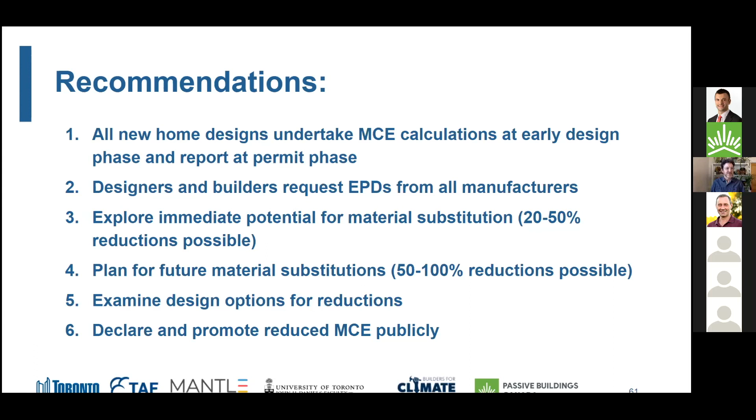And then finally, we would encourage residential builders to start declaring the carbon footprint of their homes, pushing to get really great results, and then using that. Surveys show again and again that 60 to 80% of Canadians are very concerned about the climate and want to make choices that are climate smart and climate friendly. And I think offering homes that can show that they have 40, 50, 60% less carbon footprint than a competitor's is going to be a real advantage. So, making these results part of the discussion around building and buying homes. So that's the Part 9 report in a nutshell.

And I look forward to speaking with people interested in the Part 9 study in the breakout that'll come after this break. Here, we had a really great discussion in the Part 3. Some of the main things we heard was the need for more education and sharing and dissemination. So we're going to be sharing our policy primer with all the municipal governments in Ontario.

So wherever you're located, when that goes live in, I think it's June, July, please become an advocate for this. Bring it to your elected officials. Say, we need to work on this. We need to have training sessions. We need to have public engagement. So really, we all need to be working on this in our own networks to really get this moving at the speed it needs to be.

And then we heard some notes about prioritizing reuse of buildings, reusing existing construction, and disincentivizing demolition. So that's taken into account, and we're looking for strategies to do that, because we realize the lowest carbon building is the one that's already been built, right? So that's very much on the agenda on ways that we can optimize reuse and make that part of whatever policy comes out of these discussions.

And then finally, and then I'll turn it over to Chris for a couple words, but one of the last things we heard was, the first bullet was, what are your thoughts on a reasonably easy to achieve target that goes down over time? And we actually heard some folks say it should be a little bit more difficult. People should have to work to try to get to the target, because we don't have time for 2 or 3 revisions of the TGS and having multiple years before we start ratcheting things down. We need to be moving faster than that. So some really good discussion around those points. Chris, do you have any updates from your call?